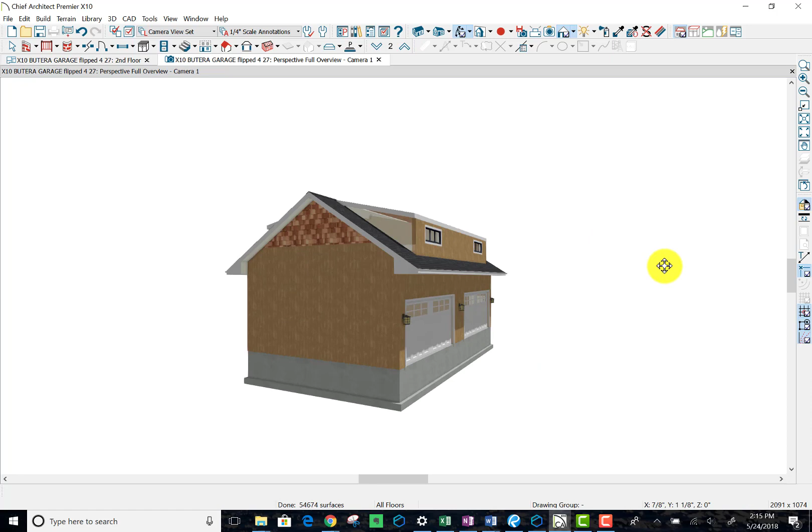This is the latest incarnation after owner input, and as most owners are wont, they keep changing things. So here's the latest change: he wants to enlarge his dormer 2 feet, a deeper window, and a skinnier stair. So this will be a video of how you make some of these edits.

Alrighty, let's start with the dormer stretch. From the plan, fortunately we have our guidelines, which are also our dimension lines, which we put to the end of the 5.5 inch wall. The carpenter always frames to the lumber, so that's what that is. So we can grab this guideline, grab this dimension, and change that to 2'8". That leaves us 2'8".

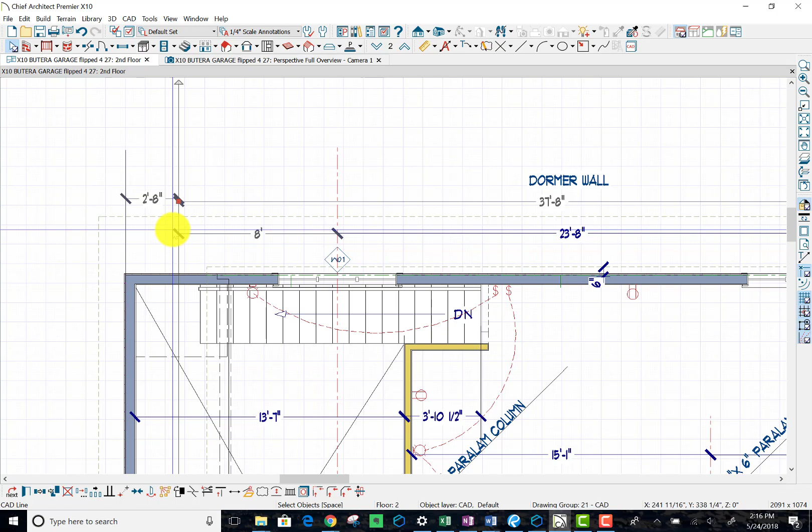Oh, we also wanted the overhang stretched, so we'll stretch the overhang to 2'8" as well. Now we take this dormer wall and scooch it over till it snaps to our guideline, which is the nice thing about Chief - it does a nice snap. I highly recommend it. Okay, now this roof needs to go here.

Oh, and we're missing this guy. Remember when we looked at the 3D, this wall was gone. So we can take this wall, Control C, Control V, put it here, do a little whirling dervish there, and pop it there.

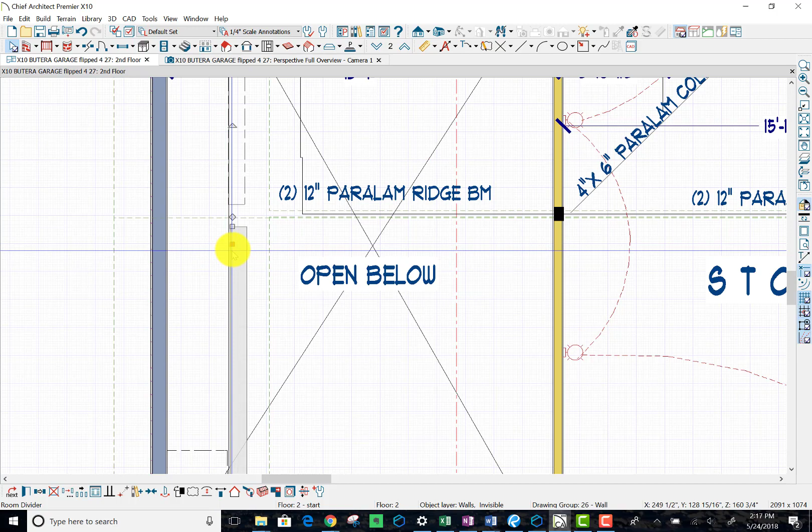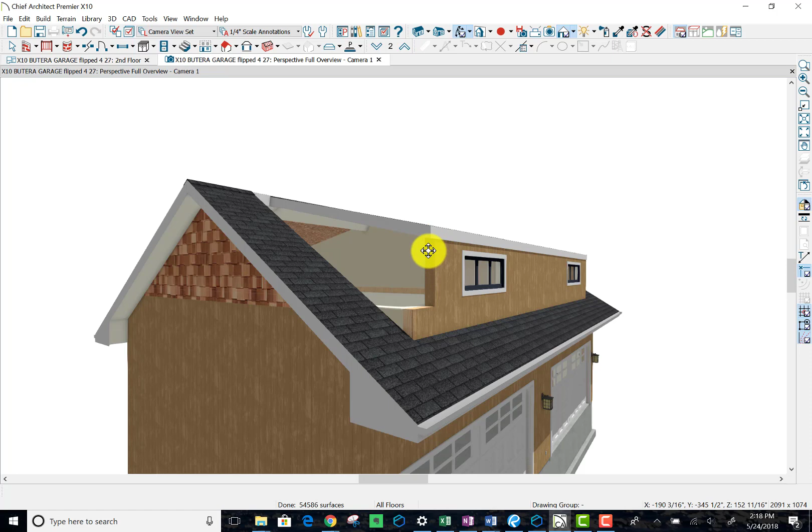And slide it there. Although we may want to flip it. There, now it's there. So now we have that wall. Let's see what that did in, I think, perspective full overview. No, it's still doing some stuff because we haven't moved the wall over. We're going to need to move the wall over. So we move this over. Oh, we still no - there was an invisible wall here. All right, we're working on it.

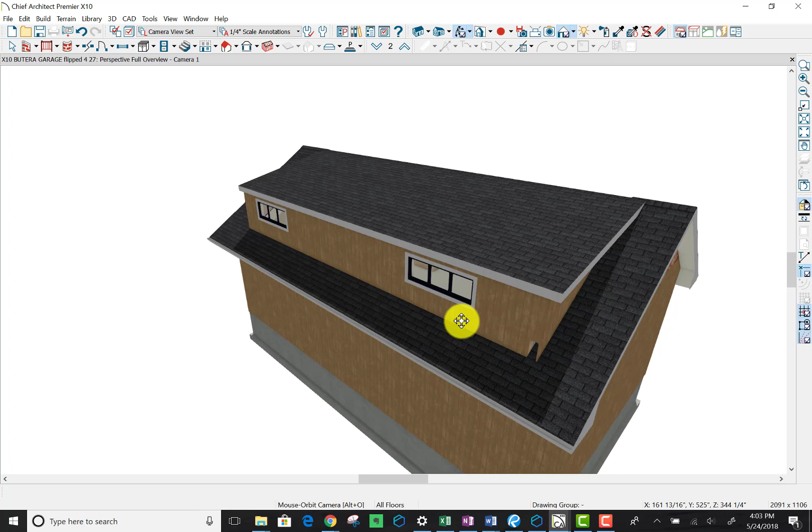Okay, I was going to make this a video for everybody, but I think I've already done one of these. So this is the 3D view, and I'm working on editing, moving this over 2 feet. The only way to do this - there's some glitches that happen when you start a project in Chief 9 and migrate it to 10, especially with the very sophisticated algorithms to create a dormer that's cut off at the roof so you don't see the walls going down inside.

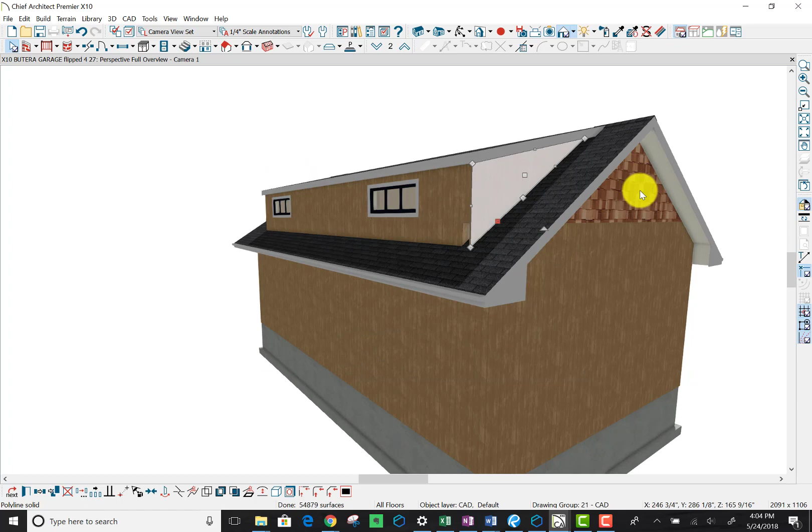It's a very complex algorithm, and it just gets goofed up between versions. So I'm pretty much hand building - like this is a little 1-inch material, solid polyline that closes off that invisible wall. That's just a solid polyline, 1 inch thick, with the material made to match that guy. So let me show you how to do the other side.

Okay, we've done this side. Reduce that from 4'8" to 2'8". Now let's do this side. Easiest way - I always use guidelines, which are also my dimension lines. So I can pick my guideline, pick the dimension, 2'8", and now the dimensions change accurately because I'm using guidelines, not trying to snap to a wall. So even if I don't get it perfectly, my dimensions are perfect, and that's really what matters.

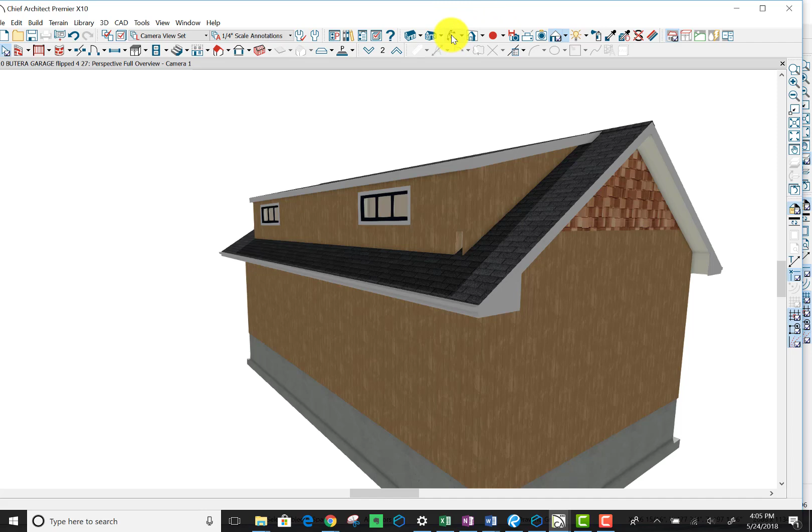So now let's find that invisible wall if we can grab it. Yeah, this is the issue with dimensions - there is no wall there because that's open on the other side. If we switch this around, I think that's empty. Okay, I don't have walls there, I just have these little 1-inch guys there to close that off, if I'm not mistaken. It's not a wall surface, that's a polyline to close off the dormer ends, and that's all we care about because this is for looks.

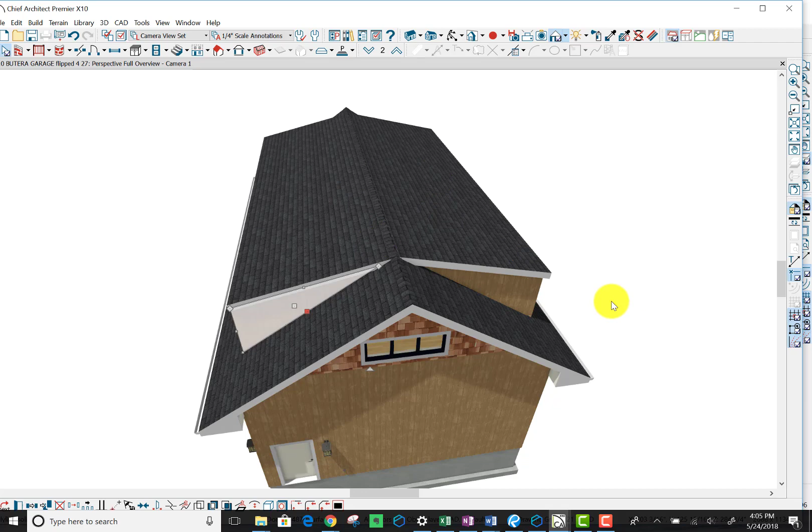All right, so I'm not even going to concern myself with the dashed line - that will tell us what to do. We'll just use, instead of trying to build a wall, let's just use a box. And we know that we want the box to be 5.5 inch wide because that's the width of the studs in the United States. Hello, grab that box, will you?

And we grab it - the line style is this dash line. Let's bounce it out to about 25 so it punches out a little bit more. And let's create a little transparency - make sure that the fill style is transparent. Yeah, none, so that'll be good. So there's a 5.5 inch wall.

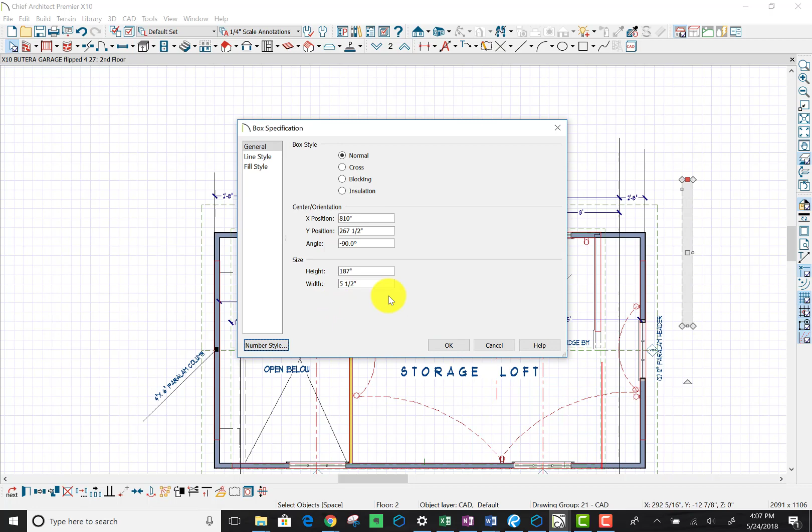Oh, is it 5.5? No, it's 14. We got to go 5.5. That's 5.5. Now we have a 5.5 inch wall, and we can stretch it. That's 5.5, are you sure? Oh, this is because it's got all the other layers and whatnot. Let's just keep to our 5.5 inch designation, and we want it there.

And since this is just text, and we do want it there, now that will read as the dormer edge in plan view, and we have a dimension there. And in the 3D view and the elevation view, we are stretching everything out to there to make that correct.

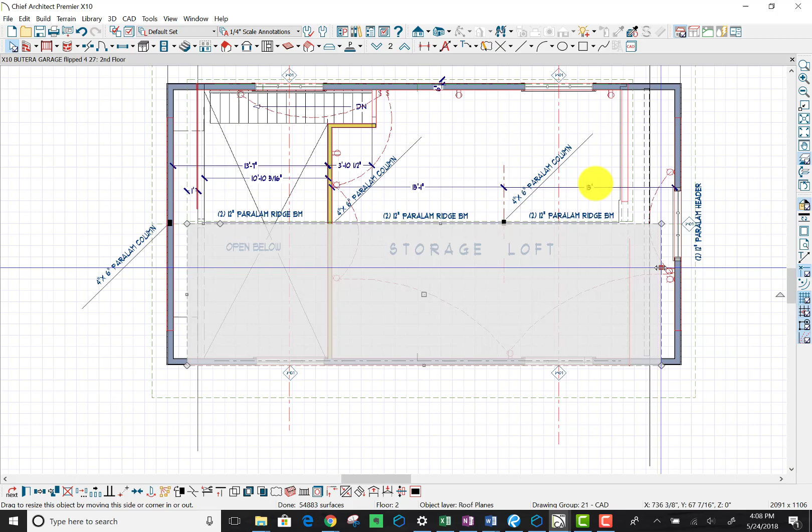This is the roof plane above the dormer. Here we've got it stretched out to 1. So now we'll grab it, go past that line, and get a little closer.

If we want to be 1000% accurate, we can draw a line. Something's downloading in the background, so it's slowing this down. Take an end-to-end dimension from there to there. 1 0 3/4. We're pretty darn close, aren't we?

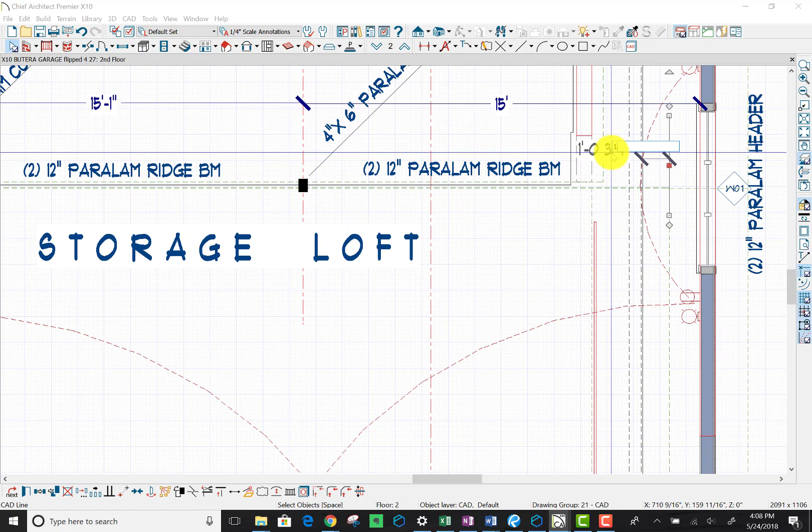Yeah, so we already have a dimension in one place. So if we want, we can just take this line here. We want a 1 foot overhang. That's what the owner wants. And now we have a 1 foot designation on that side as well.

For the overhang matches that, the roof plane matches. So let's see what happens there. So there it is, that 1 foot overhang is now there. Now we got to stretch this guy so that it matches. That little 1 foot overhang creates more of a shadow line.

And let me slide this back to the other monitor. It just disappeared. So now let's find this roof plane. See if we can pick it. That's the one we just edited.

Let's find this roof plane. Tab. Where are you, Mr. Roof Plane? It's this roof plane right there. And we want it to go to this line.

So we can just, if we really zoom, grab the handle and just go to that line. And there we go. And let's see if we can find that 3D view somewhere.

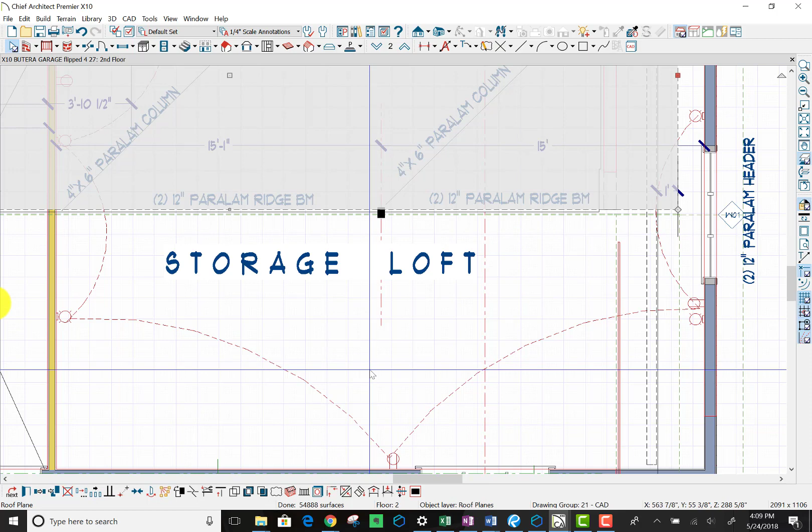Where is the 3D view? That's not it. There we go. That one right there. So now there it is, that 1 foot stretched out. And now we've got the dormer stretched out to where we want it to be so that it looks.

It's not 100% a Chief thing. Now that wall needs to, this is not correct. That has to be scooched out as well. So let's work on that on the back side.

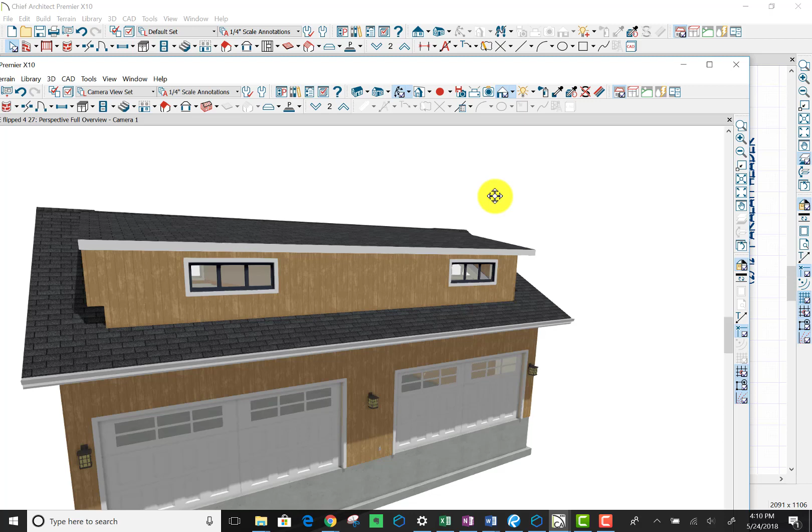So on this side, does it look right? On this side, that doesn't look right either. Both of those walls need to be scooched. That's right. We can just fill that in a little bit there. Or something's wacky here. We got to go in the attic space and delete this wall.

Well, we'll worry about these little edits later. You'll see how this is just a difficult. You're absolutely right. This is a difficult deal. Not easy. Not something that, if you're not familiar with the program, you shouldn't mess with.

These are automatically generated walls. You just snap it to there. Now it's fine.

Take this guy, this empty guy. That's the corner guy. Let's go to here. And this wall. Come on there, dude. Let's stretch this guy. This might even clean up the facade. Stretch it to there.

Let's take this guy. Let's delete it. Yes. Grab this guy there. And we're going to stretch that guy. Stretch, stretch, stretch, stretch, stretch. Okay, yeah, we want to go all the way.

Is that where we want it? I think so. All the way to... No. All the way to here, because that's the outside wall. All the way to here is where we want it. It matches that. And let's see if that cleaned up.

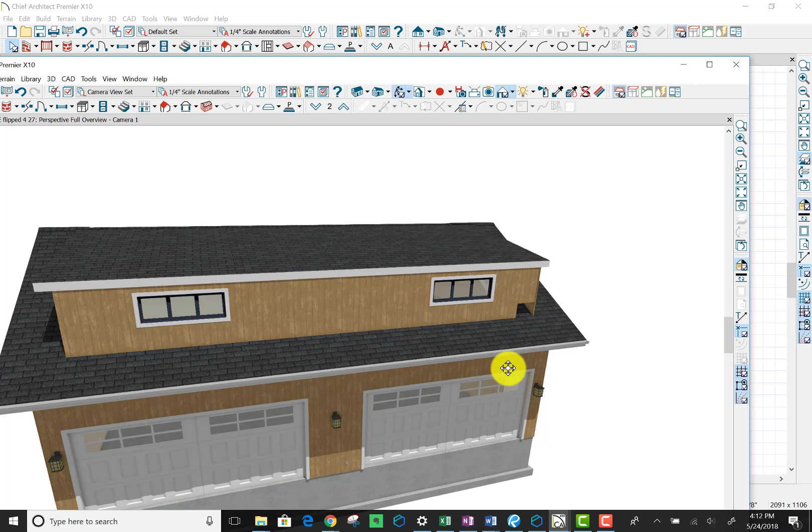This cleaned up some stuff. A little bit, yeah, that's clean. That's pretty clean. We can play with that to make that super clean, but that is what we want it to look like. So let's move this back to the other window.

That's pretty darn good. That is what is happening in the attic space, the attic wall. And this is our designation. And you can see here, what I think I have an invisible wall. Yeah, I have an invisible wall that is the attic wall. And I think that's mucking everything up.

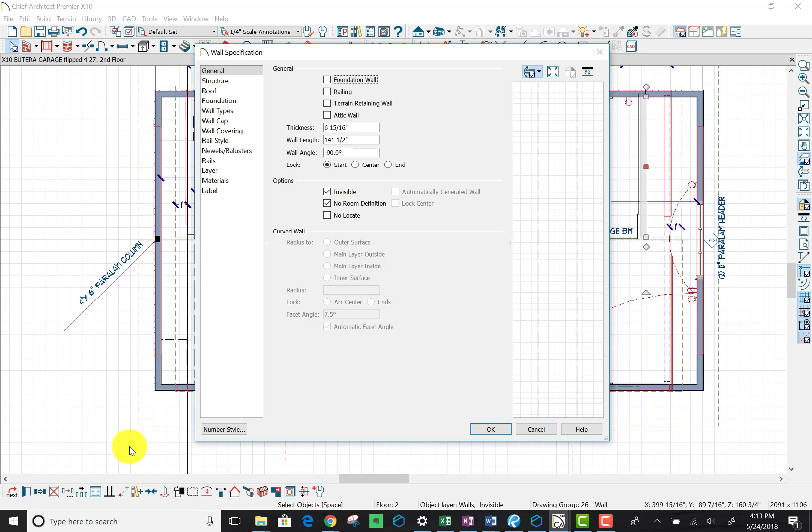Let's just move this invisible wall since that's just a... All right, let's see if we can scoot this guy. Scoot that invisible wall to on top of our two-dimensional 2D drafting. And now we've got this other goofy thing.

This roof. What is this? I have no idea what that is. But that should go to the inside face. There.

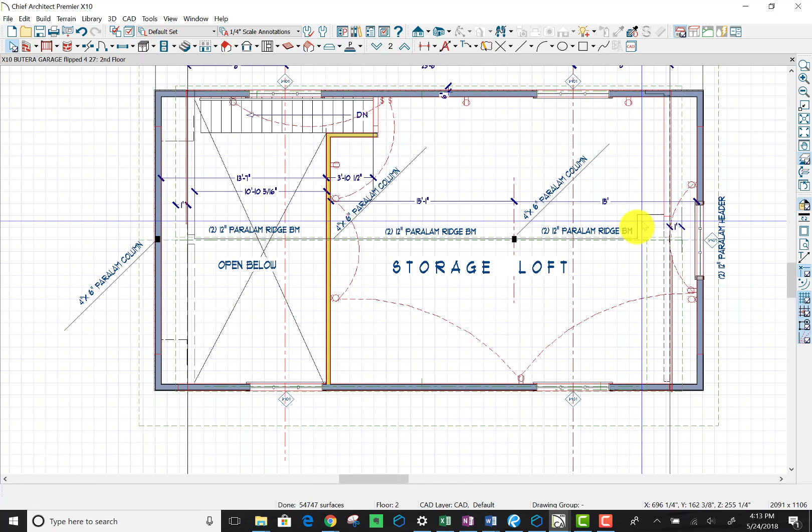This is some weird translation thing between 9 and 10 when we copied it over. This is actually a hole in the polyline, I'm not going to mess with that. It's working fine now. It works, and then there's something weird going on there.

If we line it up, it'll be better. There, I don't know if that cleaned anything up. Do we clean anything up? I'm not so sure. On the back side, do we clean anything up on the front side? Oh, we don't have this clean.

This is that lower roof. This lower roof needs to be stretched to there. That's an issue.

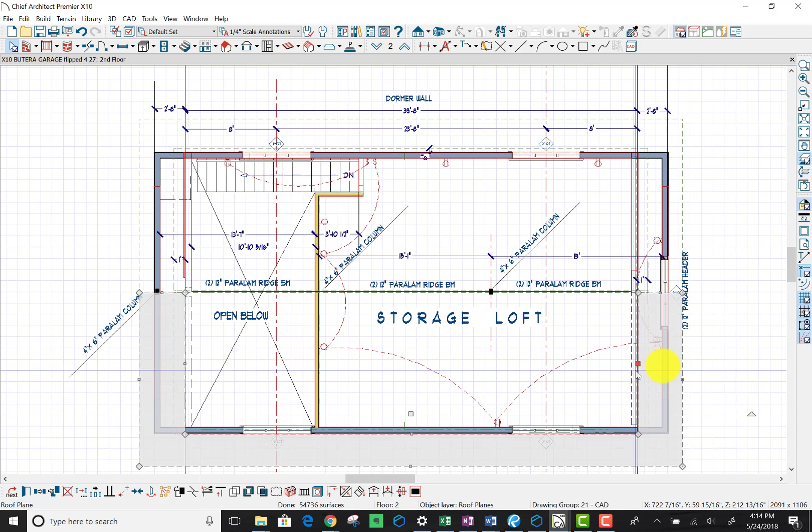Yeah, hopefully that should clean things up. All right, let's take a look. See how that helped. Well, it helped a little bit. Let's see, sort of, maybe. Did we go too far? We may have gone too far.

The attic wall, we had an attic wall generate. We should get rid of this attic wall. It automatically generates a little end piece, so we can delete that. Yes, we don't need this stupid thing. And there it goes, so we're much better. See, it creates these automatically generated walls, and then you have to manually delete them.

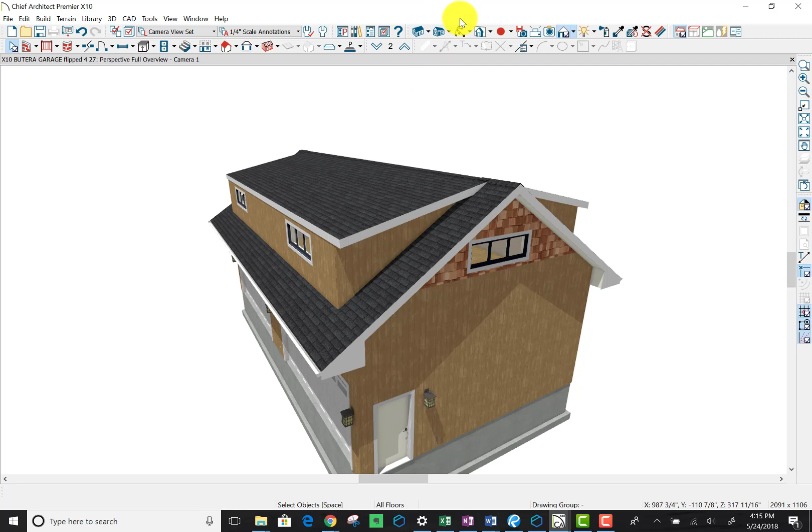You just got to play with the program to learn all the little workarounds. But usually you need workarounds when you switch from versions. That's why it's really best to go clean. Start a project clean in one version, and it'll have no anomalies.

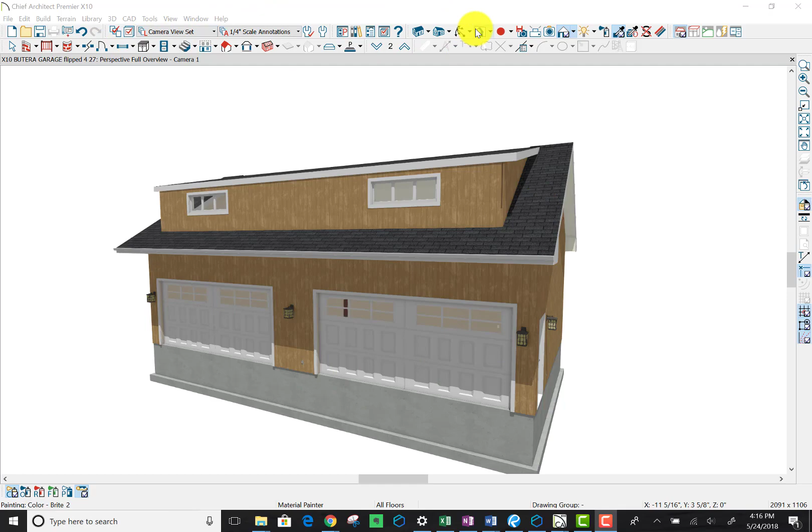Alrighty, there it is. That's looking better. That's looking more like what he wanted. Swooch and scooch it around there. That's looking good, that's there. I think we got the dormers pretty much under control.

You know, this we can clean up with a little something or other. This we're missing, we got a hole there. There's a hole in Daddy's arm. All right, we can clean that up. Let's clean that up.

Yeah, hello, where's my cursor? I lost my cursor.

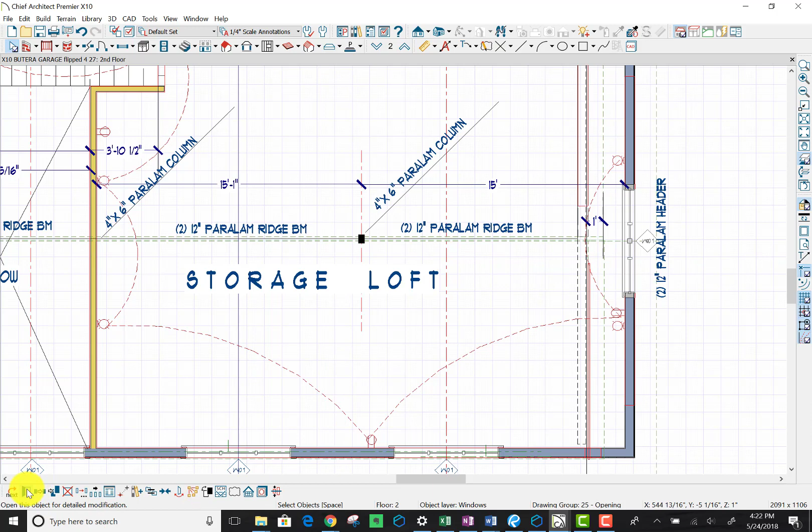Okay, let's just pick this window. I'm just going to drop it. I don't think that's the window, I think that's a line. Is that the window? Let's check, go to our dialog box. And it is the window.

We like everything about it, except we don't like its height. Floor to top 80 is good. Let's go 36, that's a little nicer. 42 might be a bit much. 36 is nice, let's see what 36 looks like.

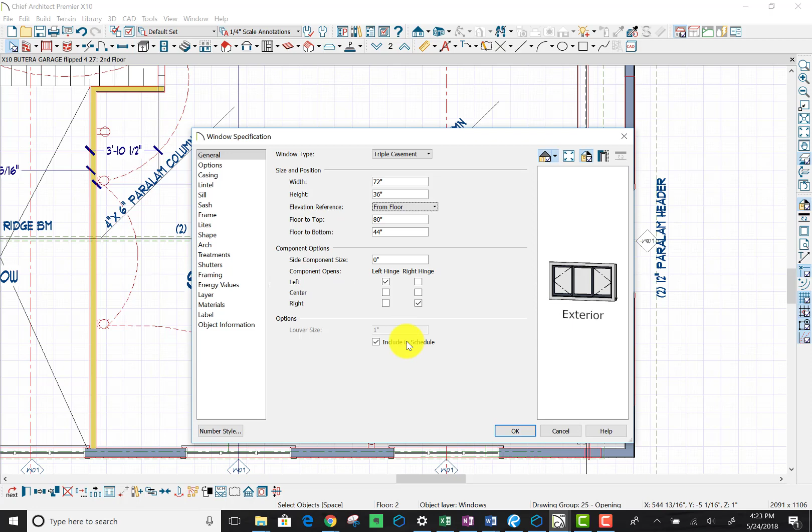See if that's something that is aesthetically appealing. Take our cursor, move around. Yeah, that's pretty good, I think that'll be a nice window.

The other thing they didn't like is this. We're going to put a band across here, so why don't we do that now? Let's put that band across there and drag this. This is a polyline solid to indicate the detail siding in the gable peak area.

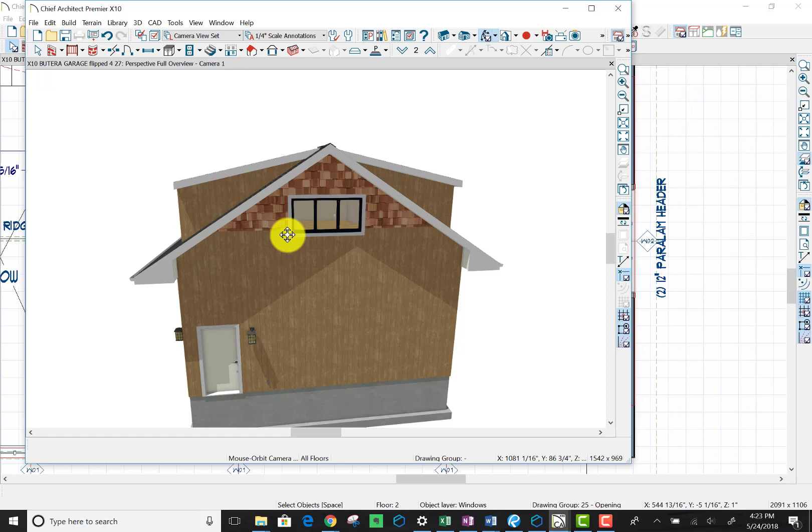So let's put this back. Our cursor did not disappear on us.

And now let's go to level 1, let's go to the section view set. Section view, and that should show the sections. It's this elevation that we want. We want to work with the flat elevation. There it is.

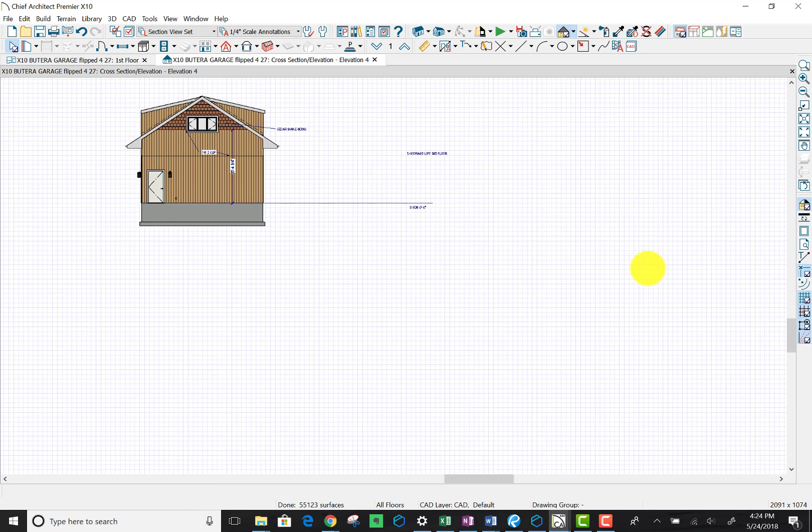And I've got some extra stuff here. We want to find the 10-foot line, so let's draw a line. I believe that is the 10-foot line, but let's take a dimension from there. That's our top of foundation. 9' 11", we're pretty darn close to 10 feet. Let's make it 10 feet.

Okay, sorry, used the wrong character. 10 feet, and there it is there. And if we snap it there, we're pretty close. Close enough, we're just kind of faking it in there.

Now let's get a polyline solid working. So we go build, primitive, polyline solid. And if we really want to be accurate, let's just zoom in here. Snap on that line, found that line. Lovely how that works, that's what I really like about Chief. It intuitively snaps to the lines that you draw. It says, I bet you want to go here, don't you?

Yes, sir, I do. And 9 is pretty close because that trim board, American Lumber, it's called a 2x10. And a 2x10 is actually 9 1/4. And if we really wanted to be nuts about it, we could call that 9.25. That is exactly how thick that trim board really is.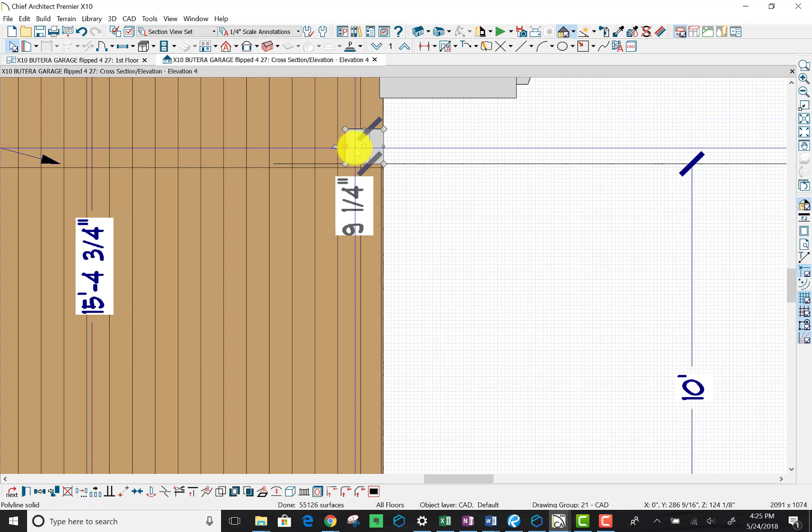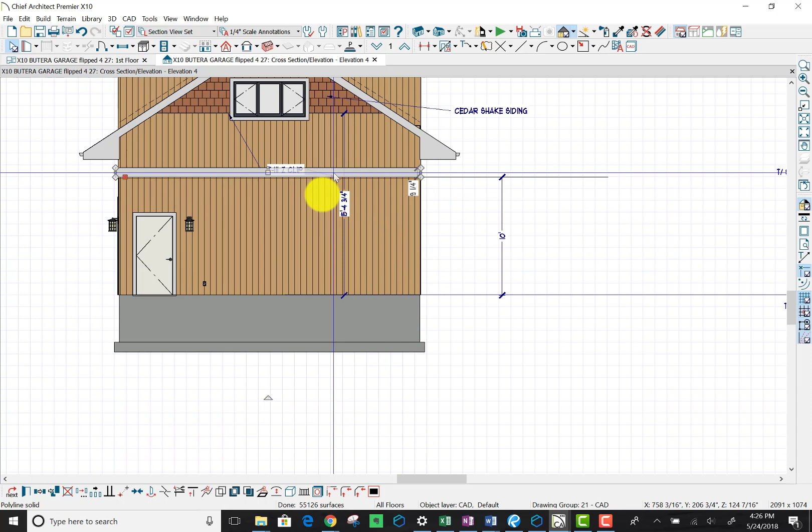The bottom of the trim board will be a 10. And we're going to wrap that trim board all the way around, it'll be a band board all the way around here. So we'll have that band board go all the way around, and that'll hide the Z-clip. The Z-clip is a 10. These panels come in 10-foot panels, so it'll hide the joint between the panels.

Here we'll have this panel here, the T111 panel. And so there's this guy.

And what we can do is, oh, that's actually an attic wall. How about that, that's just an attic wall. What we can do is then we'll take this designation, say we want that material to go on this wall here, and there it is, because that's our second floor designation.

And we don't have to worry about this darn thing. Why? We don't need this dimension anymore because we're not going there anymore. So we just delete that. Tab, you don't have to worry about that.

The T111 Z-clip note can stay, but we don't need that 9 1/4 note because this is a working drawing. Everyone knows that's 9 1/4. So let's just delete that.

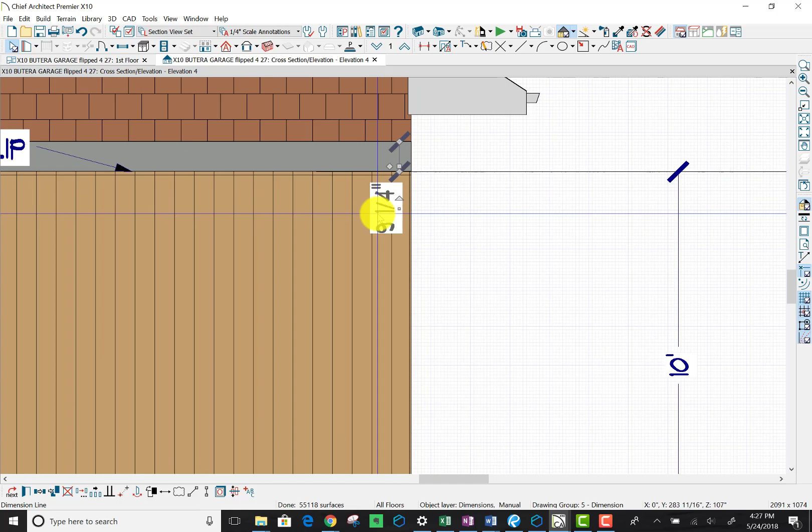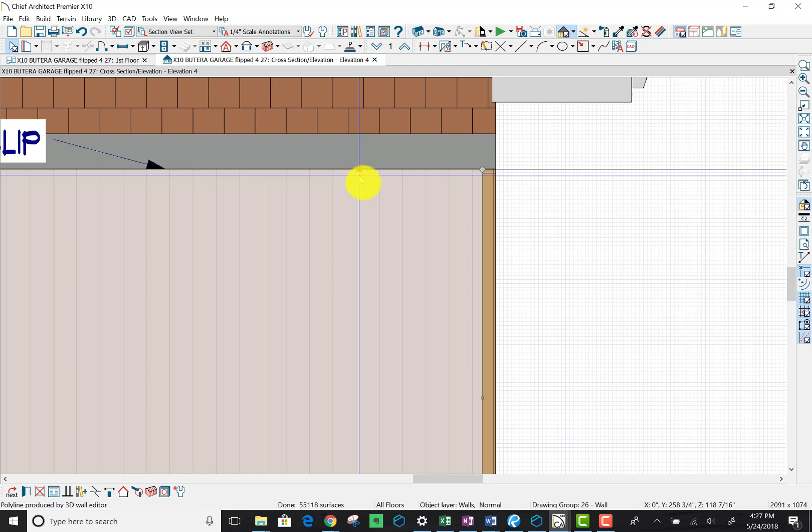And we don't need this little extra line either, do we? Cancel, get rid of this. Come on, tab, tab... All right, it's not the end of the world if we have to keep it there, but I'd rather not. I can't find a way to grab it easily, and I hate spending time.

And again, it's probably between the two versions. We have some wacky stuff.

We want this material, let's change the material. We can change the color, but it'll have this concrete texture, so we want to change the material, not just the color. We want to go from concrete to a color. Oh, Christ, I hit OK instead of... All right, materials, concrete, select material.

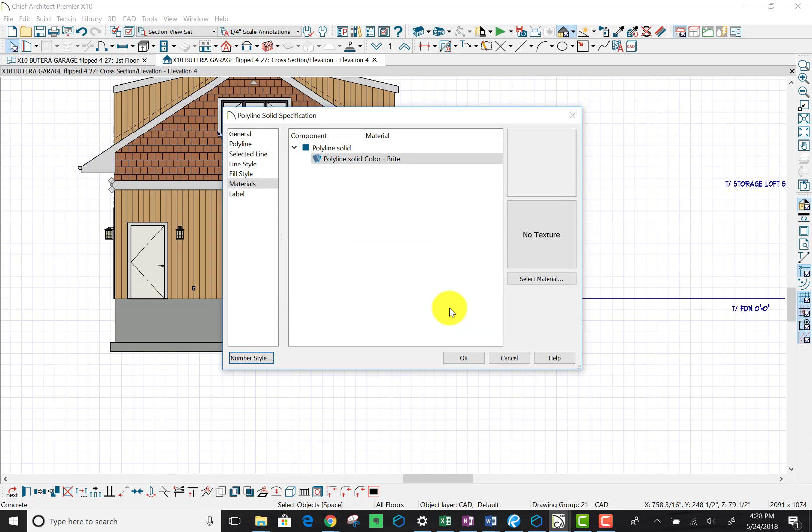Plan material will have a list of materials that we're using. Let's go Brite, yeah, I don't know, I think we're calling it Brite or bone. Let's go bright, so let's just remember we're going to use Brite for that trim board. Very similar to bone. Yeah, see, it's a little brighter. You really can't tell.

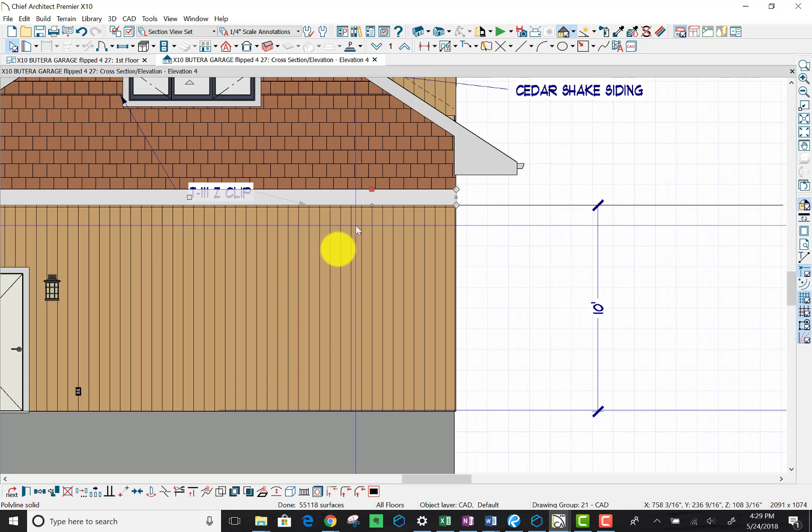I don't know if I like that, maybe that should be meatier. This should be a bigger trim board, looks very wimpy. We should make it a 2x12, which would make it 11. So let's make this 11.

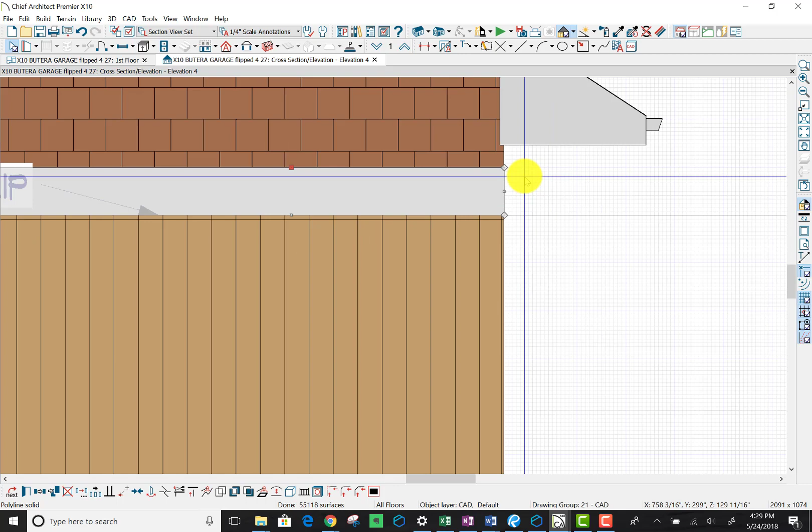And let's just scooch that up. Hit. That looks like 2 steps, goes on 1-inch increments. Or that looks like even 12. We can count the inches here, these are in 1 inch: 1, 2, 3, 4, 5, 6, 7, 9, 10, 11, 12.

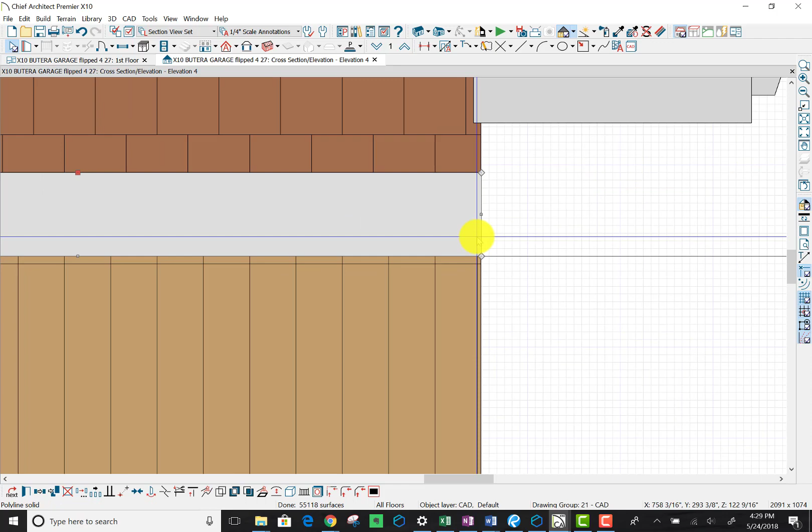So we got to go back down 1, it's not going to be that big, it's going to be 11. Let's not worry about the 1/4 inch, let's just make it 11. That looks about right, that's a much nicer feel to the band board. So we'll use 2x12 band board, actual dimension 11 1/4. And...

That's what that is. He also wanted these overhangs to go to 12, so we got to change that. So as long as we're thinking about it, let's do it. Let's go to the floor plan.

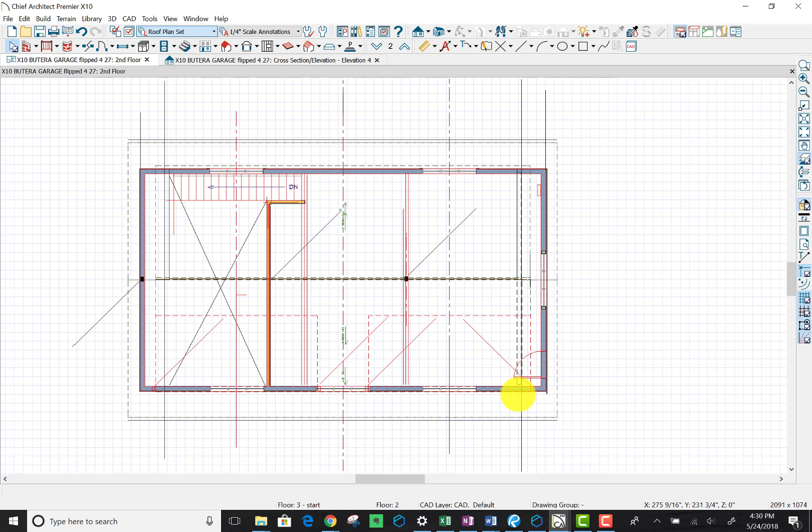Roof planes are on this level, I believe. And to make things simple, let's go to roof plan set, it really just gets rid of a lot of information. And let's see if we can find this roof plane, this dormer roof plane. There it is, you can see right there, it's right on the edge. And we want it to go 1 foot.

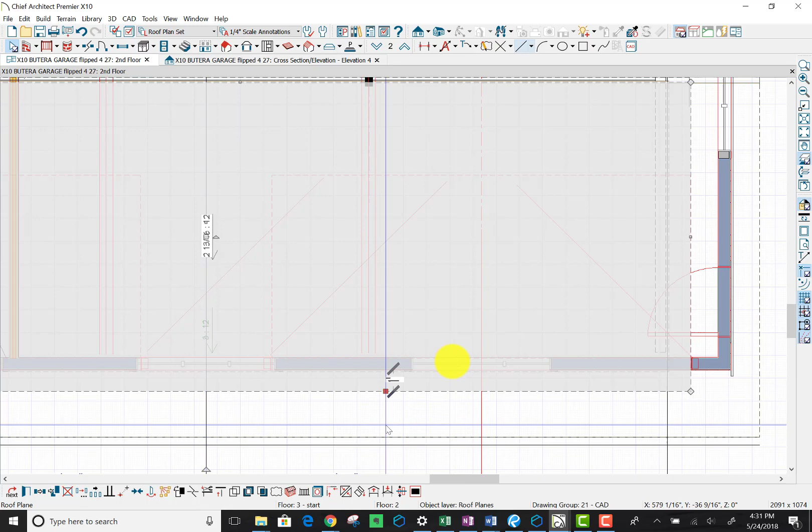He wants 1 foot. So to be accurate, and we need a dimension anyway, let's see if we can do it this way. End dimension, I go from face of stud to there. Oh yes, that's fine, let's display it in this view. And now let's pick that plane, pick that dimension, go to 1 foot. And there it is, now we have a 1 foot dormer overhang, which is what he wants.

And now let's change it to the other side as long as we're thinking about it. Right now we go to 6 inches. So here, this is nice, we can tab this, and then we can point to that. I'm going to change it to 12. Tab, I don't really need the tab. And there it is, now we have a foot.

Oh, but that's foot from the inside, is that right? No, outside face to outside face, yeah, outside face to outside face. So that's the correct dimension. And does it look right in 3D? Yes, sir, there we go.

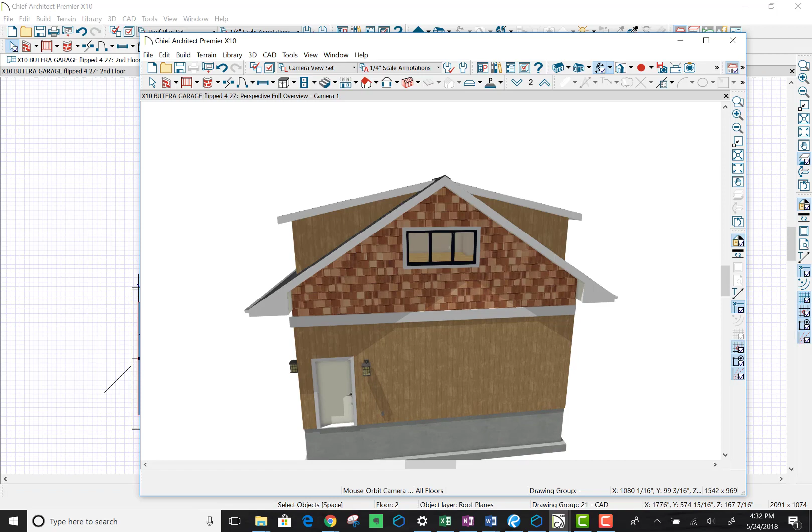All right, these are the owner's edits. Okay, okay, getting there. What else did he want? We got that, we got the big window.

Board all the way around. Deeper overhangs, deeper overhangs on this side here. We don't have the deeper overhang that he wants, a 2 foot overhang, and I think we're at a foot right now. So let's take a dimension, manual dimension.

Face of the stud, fortunately Chief goes to stud faces, as the carpenter that's what he measures from, the face of the stud to the rafter overhang: 1 foot 4 inches. That's getting there, it's almost 2 feet.

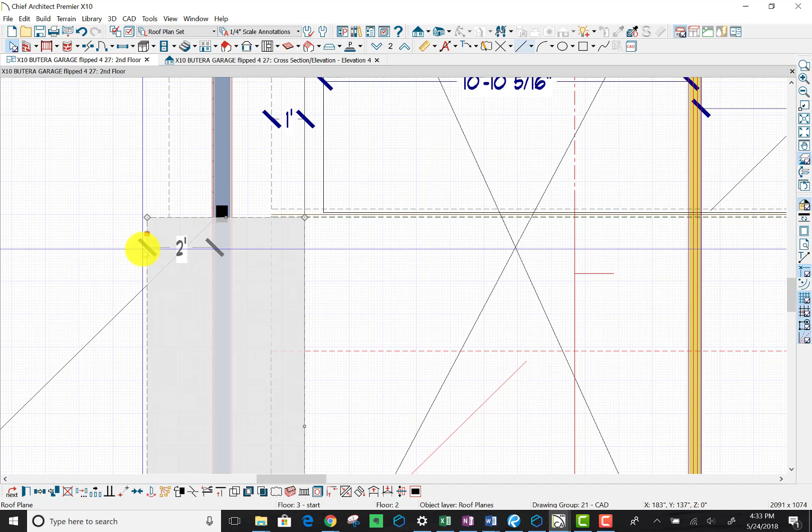Let's give it 2 feet, 2 foot, or even 30 inches, he may have even wanted 30 inches. Let's go for 2 feet. Yeah, 2 foot, 2 feet might even make it as big as, yeah, let's go 2 foot 6. Make it a big guy, let's go big. 2'6", all right, now we're talking.

Now we got a big guy there. That's a 3 foot overhang, actually. Yeah, we should dimension that. Did we dimension that anywhere? I don't know, let's dimension it.

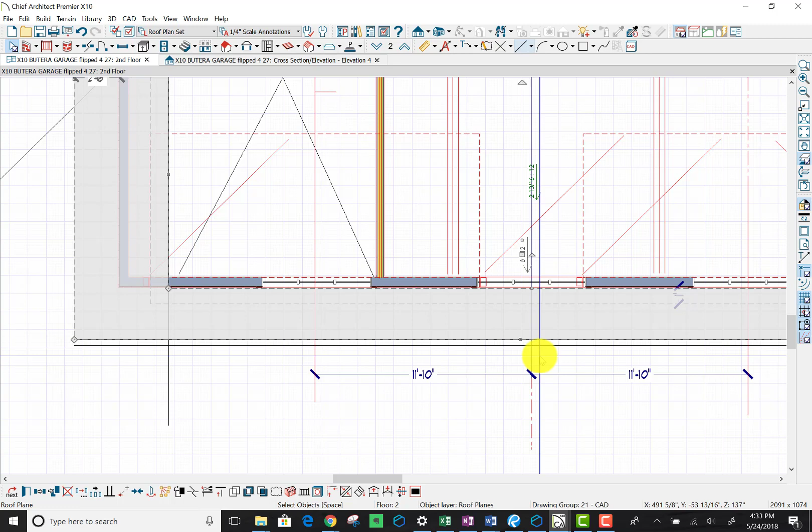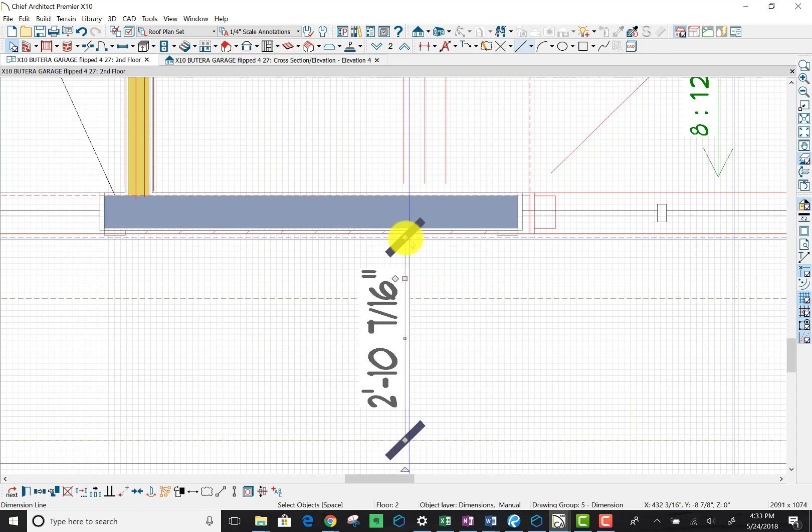And then dimension there to there, close to 3 feet. It isn't 3 feet because it's snapping to the face of the siding, but not the stud face. So we should pick this dimension and move that point to the stud face, and now it's a 3 foot dimension, which is correct.

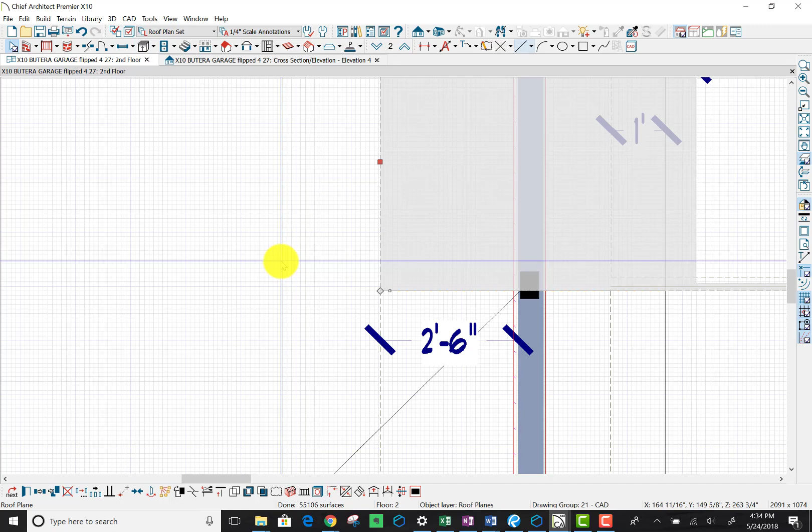And again, what I like to do, since I'm a lazy bum and don't like to just do stuff by eye, if Chief will let me, is snap to the grid line. So you hit Control to not have it snap to the grid line, then let go, and it lines up. I'm not dimensioning that one. Might have some weird 64th dimension or something, but I don't care.

And now we want to make 2'6" on this side. So let's dimension that, end to end. There. There. We want 2'6". There. There. 2'6". There we go. Okay, that's good.

And then let's be a lazy bum and just line her up. If you really wanted to be 1000% accurate, you could dimension it, but I'm a lazy bum. That's pretty good. It probably is right on. I'm not going to mess with it.

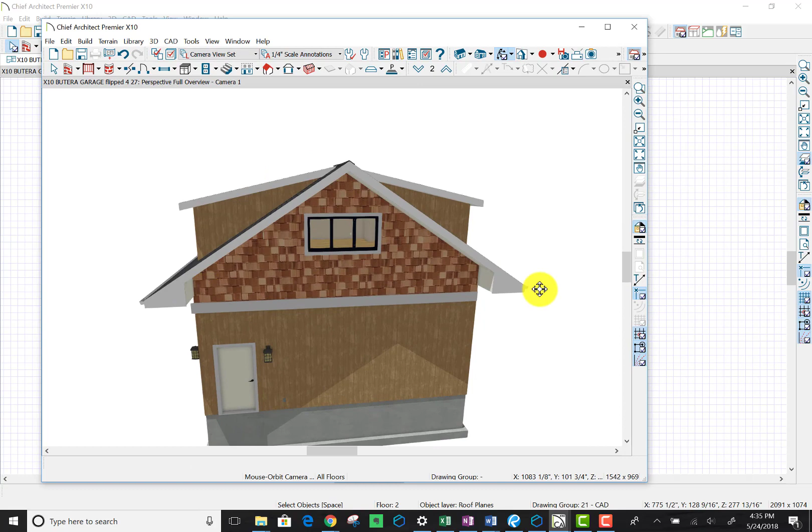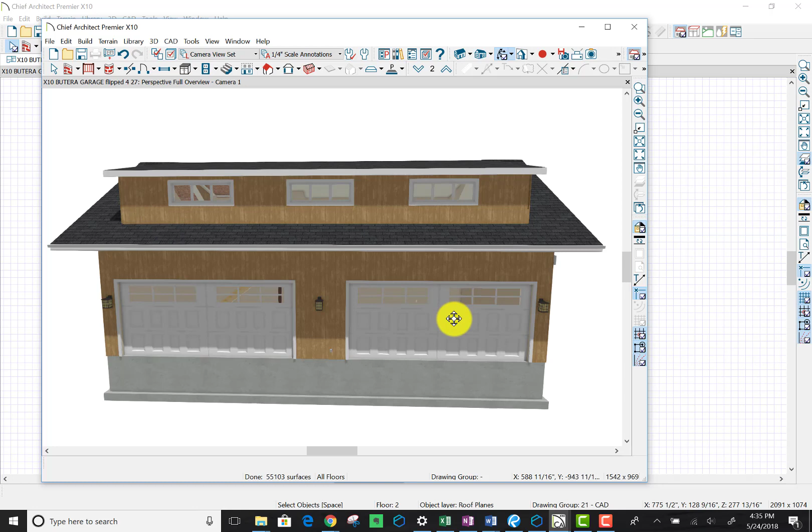Okay, now let's take a look and see if that's what he's after. So he's got these big overhangs there, 12-inch overhangs top and bottom. Yeah, it's looking kind of overhangy. Yeah, okay, all right, it's got some nicer proportions. I was worried about that 1 foot overhang coming a little too much over the top of those dormer windows, but it's fine. Okay, this is what the man wants, so give the man what he wants.

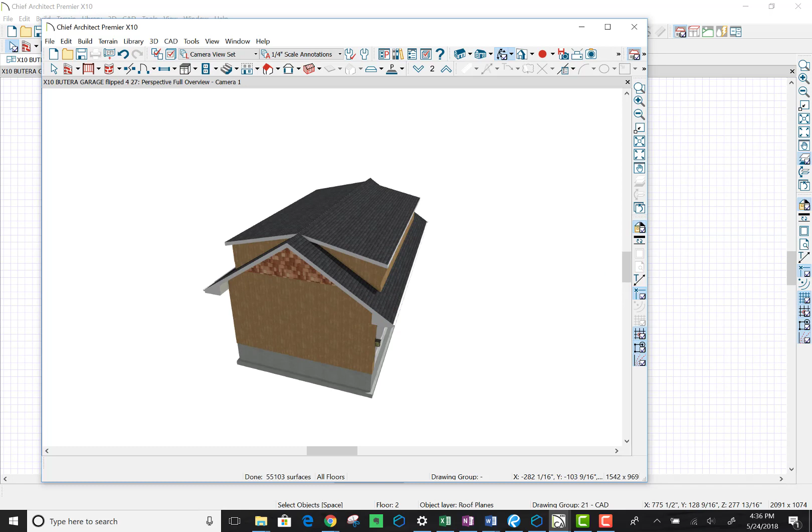All right, let's work on our other dimensions, and we're almost there. Let's work on our other faces, and we're almost there. Hopefully you're not bored out of your mind yet.

All right, let's get this out of the way. Go back to, instead of roof plan, the section view set. Now you can see that, if you go close up, you see that polyline there. We have it located exactly where we want it, so we can go Control C.

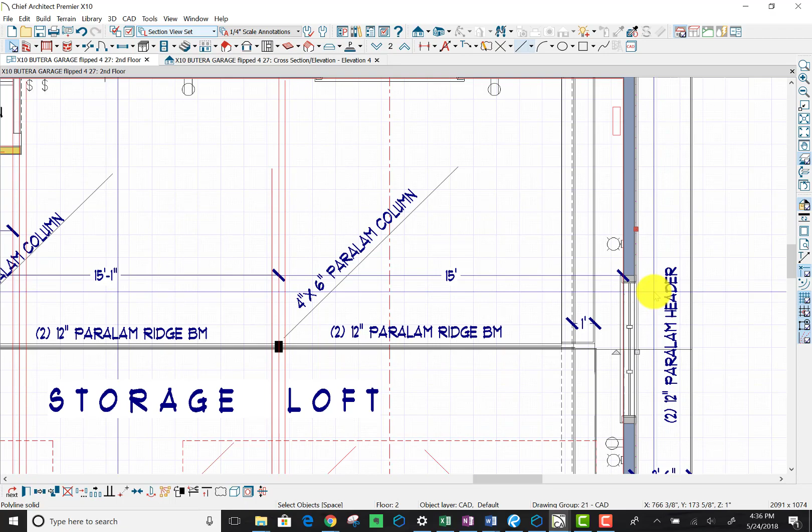And we have the material that we want, and we can put it on this face. Control V. Put it there. There's our Control V. What are these lines? Okay, not worried about it. There's our polyline, and there, snap it there.

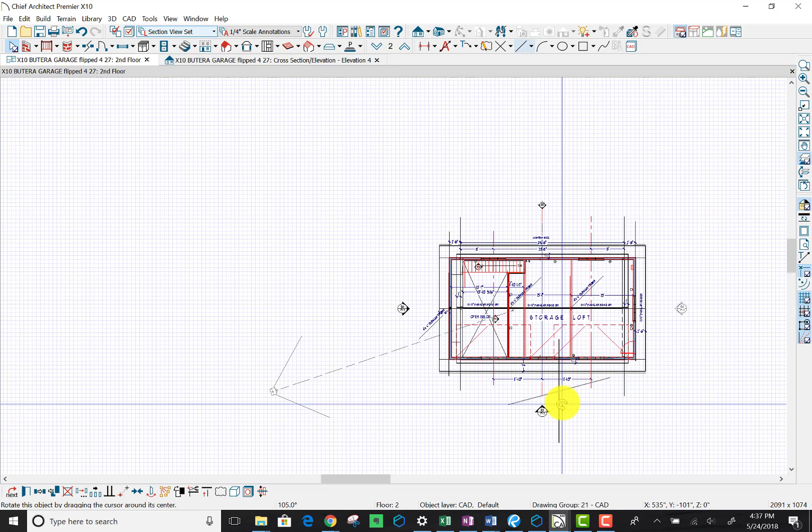And we'll edit this when we go to the sections. As long as we have this in place, let's go Control C, Control V, put it there, and then we're going to rotate this polyline. There, and then we're going to snap it to the wall face, which is there. Chief knows that's what we want to do.

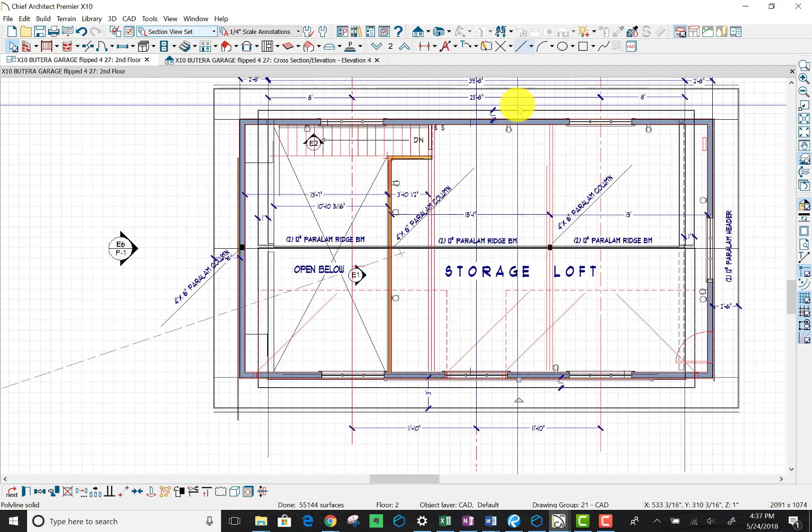And we can take Control C, copy that one. Now we're going to move it to the back, Control V, pop it there. We're going to clean it up when we go to the elevations. We'll stretch it to where we want it to be. So right now it's short, whatever.

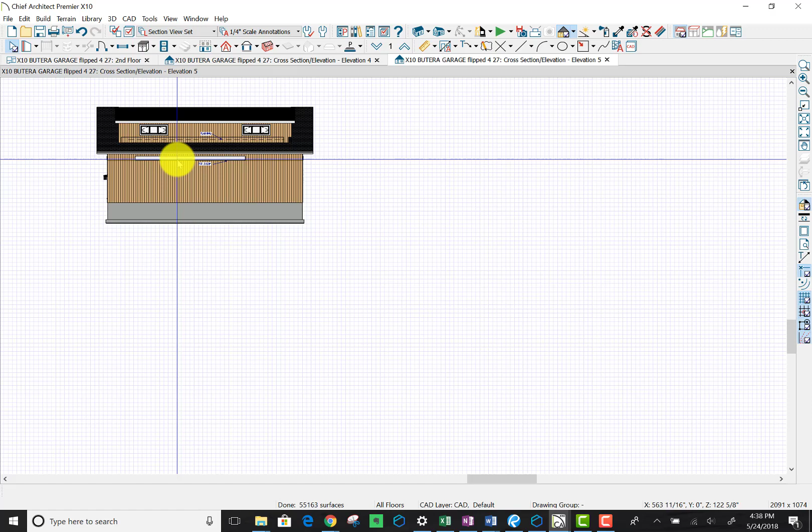So now we just go, we have our section view set. We're still in section view set. Let's go around, let's go to this section, which is also the elevation view. There it is. There's our trim board right on the Z-clip.

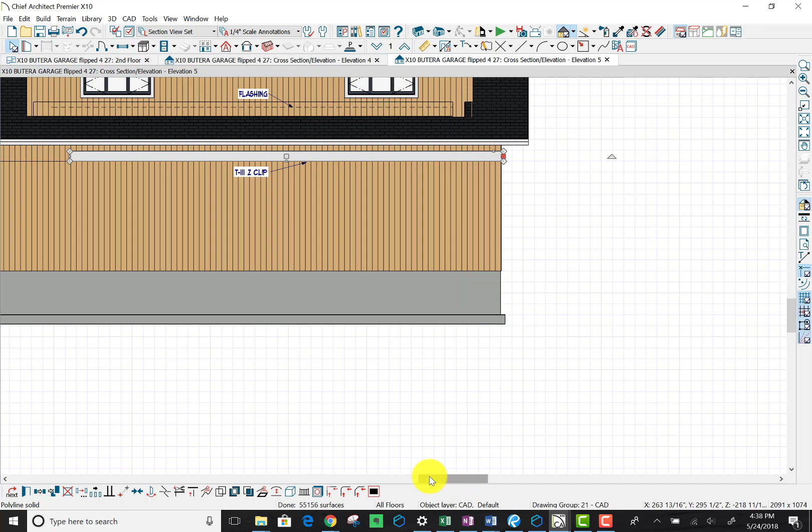Z-clip. And there. Now I just make sure I cover up the edge of it there. And scooch this a little bit this way. And grab that, cover it up there. Okay, that's good.

Now let's go back to our floor plan. We've got the back side, we got this side, we got, what side do we have? We got this side, this side. Let's take a look at this side.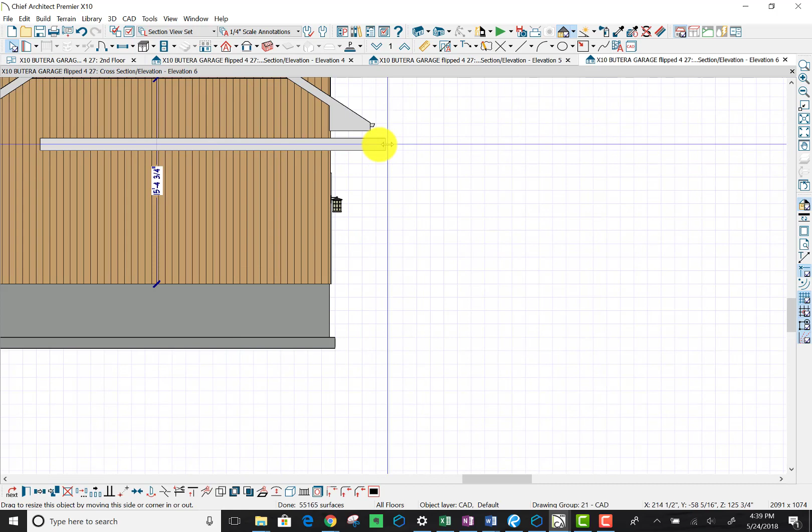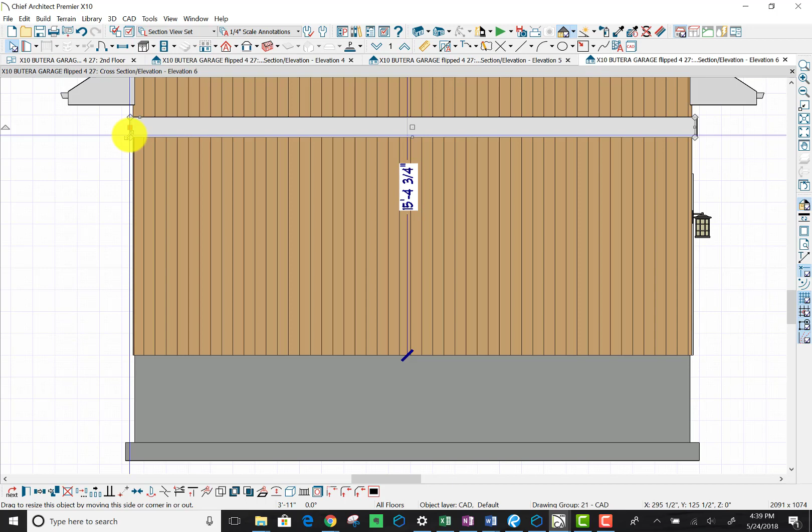See, now that's things floating, lost in space. We want to slide that guy to right about an inch, just a little past there. It's actually 1.5 inches. We're going to make it a 2x12, so to have some substantial meat to the trim board, so it doesn't warp. Trim boards really should be a decent size, unless they're attached to a sub fascia.

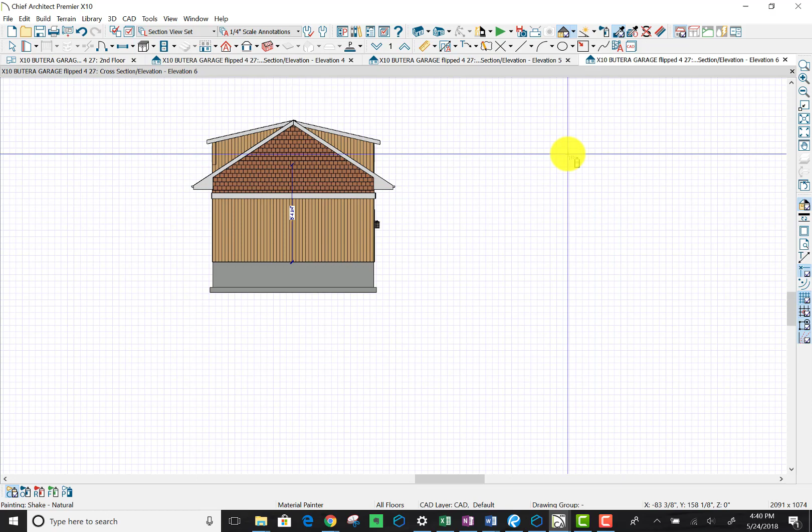And here we can just do this. We want the attic wall to match the second floor wall. And there you go, we got that fill happening. That's what our customer wants. Something like that, and I think that does the job of all the edits that our guy wanted.

And you saw how we edit it. Hopefully that gives you some insights on what needs to happen. And then we're going to do a little layout present. Oh, we're going to clean this up. Let's clean that up. So let's go back to plan.

Section. Double click on that to get our section view. Let's zoom. That means there's some weird, this is what happens with the versions. See, there's some weird stuff floating out in space here. So when you got to start clean. All right, there. You can also see that the T111 note is now, go a little past that guy.

And scoot, go a little past that guy there. But more than likely the owner's probably going to run another band across there, so you don't see this little goofy thing. So let's run that other band for him.

Should we put a double band? Let's see what that double band looks like, because that doesn't look nice, that little tiny little thing looking there. So let's see, what are we going to do?

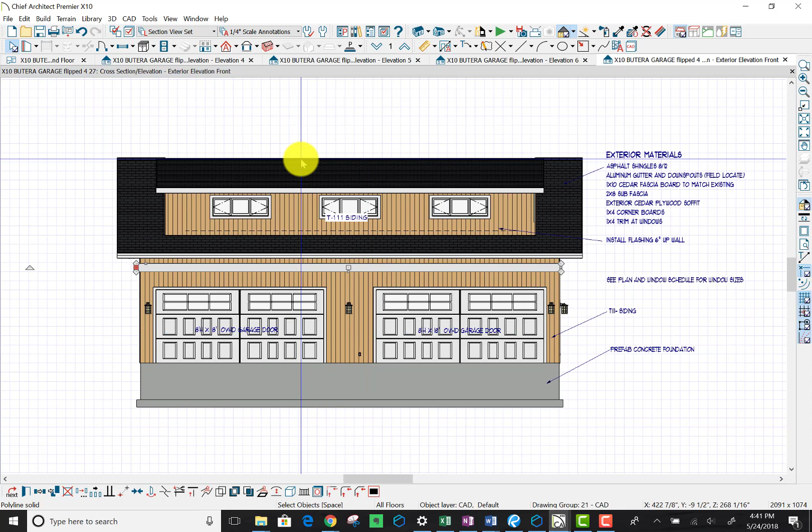Okay, just at the front and the back, we're going to just do a double board here, a double band. We're just going to scooch that guy up until it dies somewhere in there. So it looks like that.

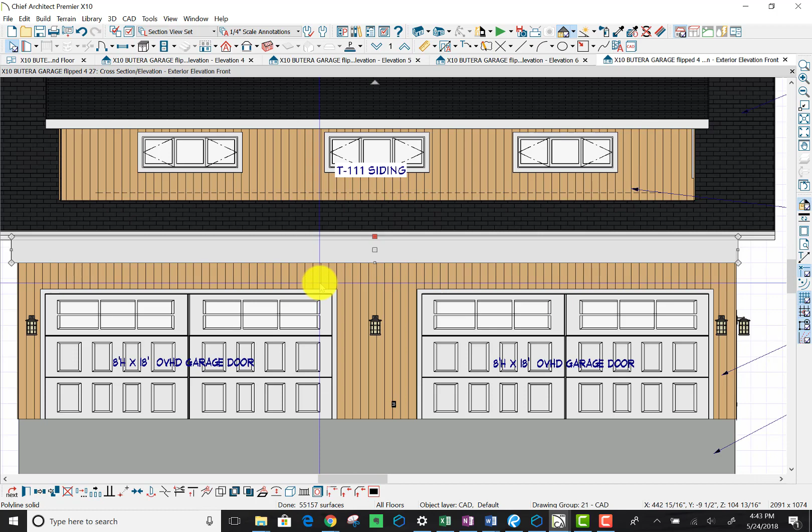I don't like the way that looks. Let's undo that, undo that. I don't like that.

Let's take this. Let's hit Control C, Control V. Pop it there. Okay, just put it right on top. So we have two trim boards, one right on top of the other. Let's take this trim board, pop it up here, put it there.

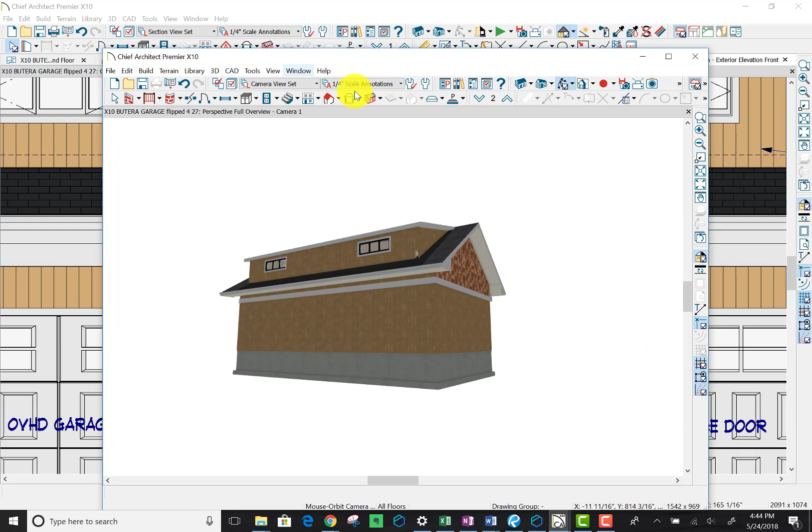I don't know where that trim board actually is in space. It seems to hide. Let's take a look and see what happened in the 3D world. It's not this side, it's the other side. Okay, yeah, that's okay. We just have a second board there.

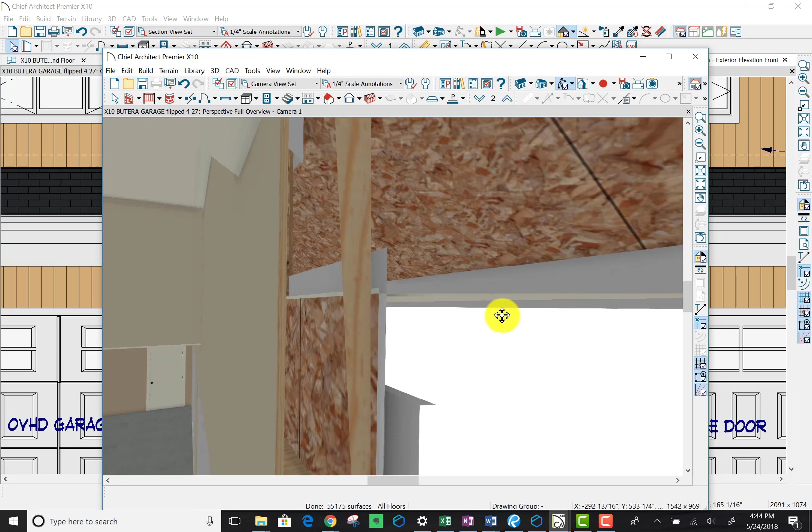That's fine. If we want, we can run that double board. Yeah, that double board. That double board can also run another board there. Yep, let's take a look further past that. We can clean that up.

Oh, that could be the copy, and we move the original, and the copy got moved there. Now we're really fine-tuning a little bit. I would just do a double on this side, and I wouldn't even worry about any other side, because that's the side that the public sees, and why spend expensive trim anywhere else except for consistency.

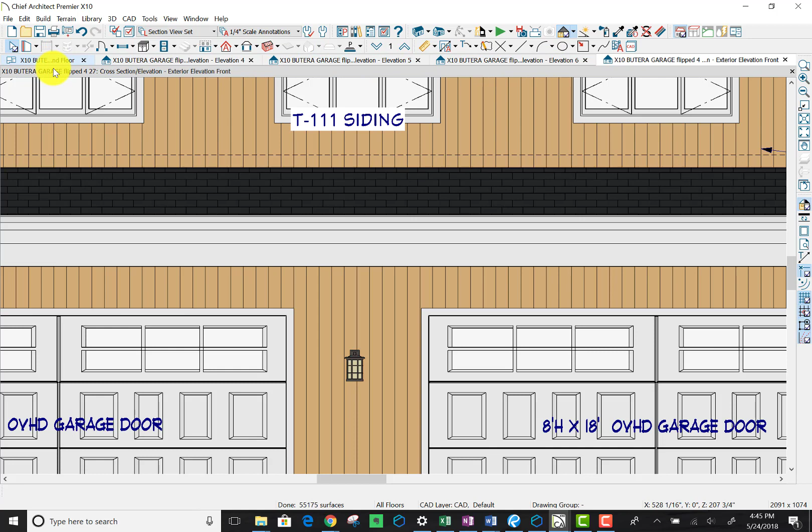So let's see what happens. Let's do a double board. Let's go back to our, what happened to our window guy? Camera. Let's go to camera. Pick the board.

I won't pick it. Okay, fine. We're going to do this from elevation views for each one of these. So this one is fine. That's fine. It still looks like it's a little out of whack, but it's not.

Okay, I'm meandering. I usually try not to do that when I record videos. Sorry about that.

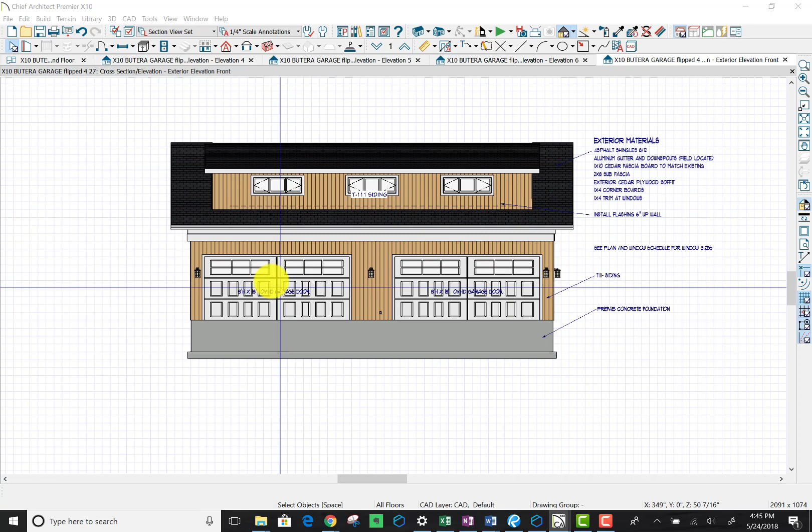Okay, let's edit this side here. Let's take this board, Control C, Control V, pop it up, and hopefully we grab the right one. We're just gonna pop it down, and we want it just to go underneath this trim board like that. That's all we really want it to do.

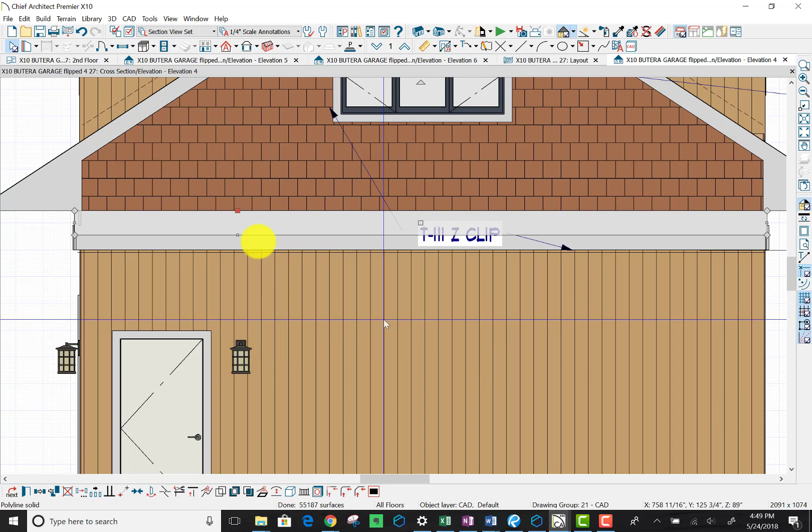What we could do is make this guy a little thicker. Just for grins, we're going to make this guy 2 inches, so that becomes a little shadow line across the front there. So it creates that sort of look as we wrap ourself around, and that does the job.

We've got all the overhang sizes that we want, windows that we want, and now let's close this view. And I'll say yes, update it to the elevation, to the layout view. I brought up the layout view. So we go to layout.

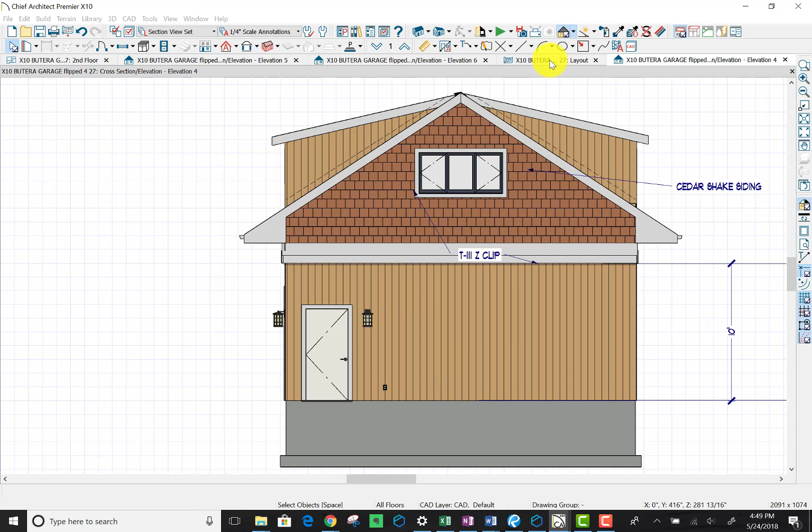Being updated. Hello, layout. There it is, it shows up there. That's there. This needs to be updated. So we can double click on this.

And we have not put our little double do deal there. Let's put a little double do. Control C, Control V, pop it up. Oh, it's sitting right on top, I assume, there.

And we want to go right there, and we're going to make it a little thicker. Scooch it a little higher. Scooch, scooch, scooch, right there. And let's make it 2 inches thick to create the shadow line that we want.

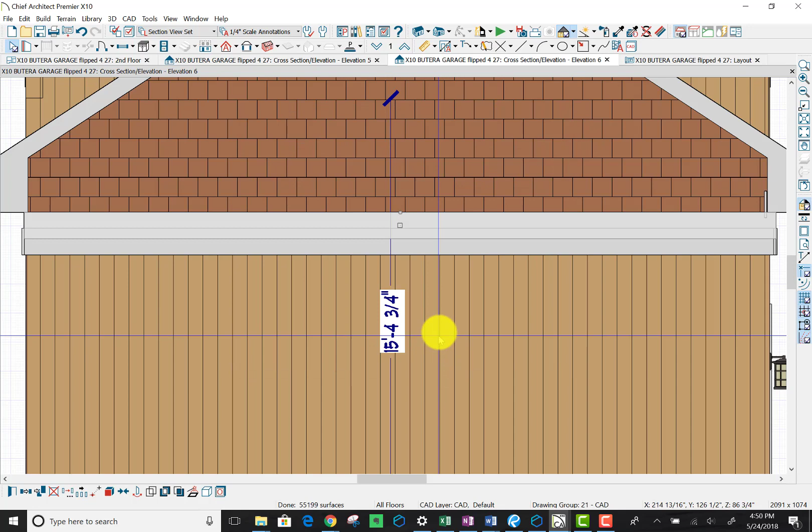So this, wait a minute, that's still not thick enough. That should be, that's the wrong one. We made the wrong one thick. That should be 1. That is 1.

Oh, that means that this guy's floating out in space is what's going on. This guy is what? So when the plan, these guys are floating further out than they should be. But you get the idea. I'm not going to get too crazy about it.

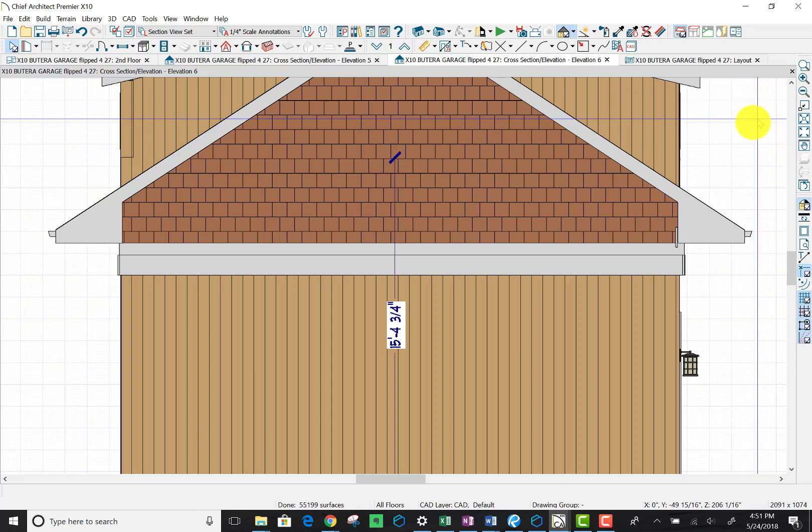And there's some extra thing floating here. What is this thing? I don't know. See what happens if we hit the delete key. Get rid of it.

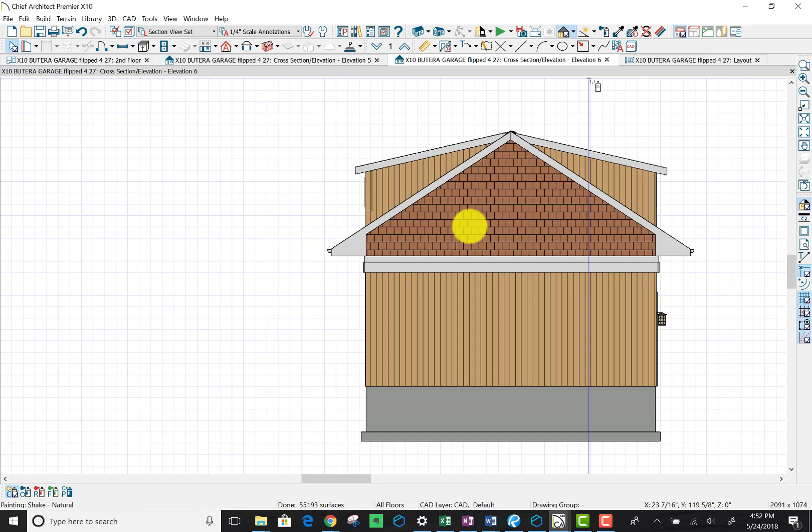We're just going to leave this like this because we don't need this dimension anymore, because we no longer are going there. We can figure out the area from the band. We got that, going all the way around. This thing has changed quite a bit. Okay, that should help you out.